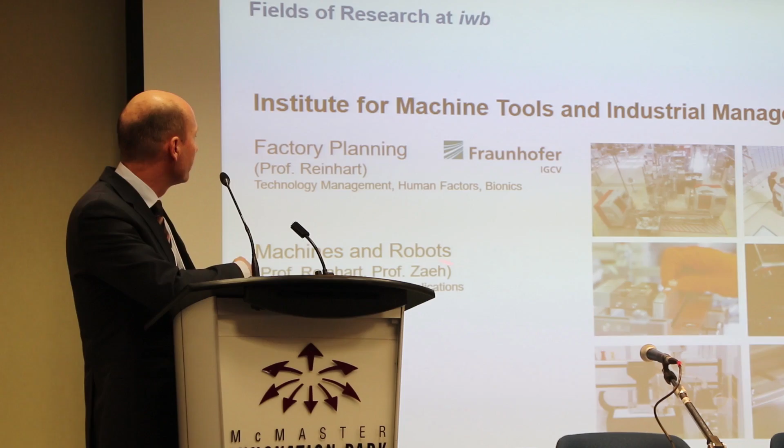Finally, we got an underground connection here, an underground line. And within mechanical engineering, together with my colleague Gunther Reinhart, I'm doing research on production technology. Gunther Reinhart is more focused on factory planning, technology management, human factors, bionics and others. Myself, more on technologies - cutting, joining, and additive - and both of us have some overlap in the mid-level on machine tools and robots. Here you see a view of our laboratory, about 3,000 square meters of floor space.

We have 2 big laser cells where we can do research on joining and cutting using lasers with full laser safety. The highest or most powerful laser source has 8 kilowatts, so that needs a very thorough design of laser safety. We also have a dry room, a clean room, to do research on battery manufacturing, lithium-ion batteries that are used for electromobility, but also for what we call the energy transition towards green energy.

The presentation is outlined as follows.

I would like to give you my personal definition of Industry 4.0, a very short definition. After that, I'll explain some approaches from our machine tool research and show how this connects to Industry 4.0. I'll talk briefly about additive manufacturing being part of it, as I consider it. Artificial intelligence is a promising thing to take advantage of in production. Then I'll show you some examples of research and other companies and give recommendations on how to tackle it.

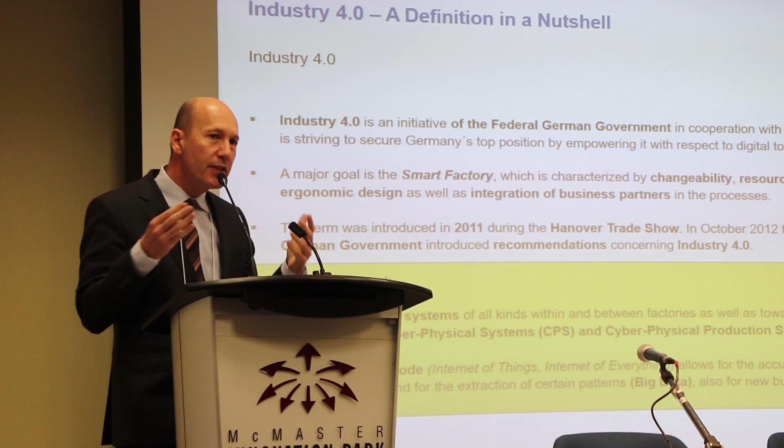To bring it to the point: networked systems of all kinds within and between factories, as well as towards customers. These items and objects we have already been used to calling cyber-physical systems or cyber-physical production systems. This word is a little bit older, meaning systems with some kind of computational power inside of them, some kind of intelligence, and above all, able to communicate.

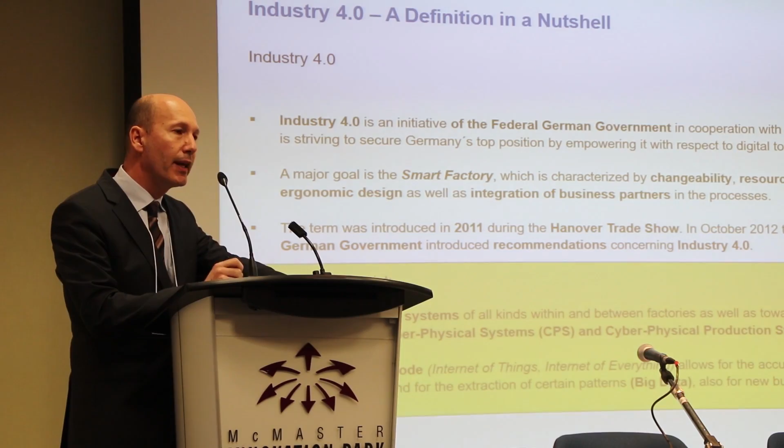This creates data, this interconnected mode. So we are talking about big data approaches, taking advantage of certain patterns in that data. And it will also allow for new business models. So companies have to be aware of remaining up to date, not losing their competitive position because someone else develops a new business model. For example, if someone would position himself between automobile manufacturers and customers in such a way that customers just pick a vehicle on demand, just when they need it.

So that's my definition, and I could finish my presentation at this point because there is not more to say about what Industry 4.0 is. It's as simple and easy as that.

However, the question is, what is it good for? Is it a new bubble that will explode soon, or can we take advantage of it? And certainly we can.

Certainly we can. It's meant to, or people think it's good for, increase of flexibility, smarter integration of the workforce. We say meaningful work, meaning to take advantage of the intelligence and capabilities for fine manipulation of humans, but integrate them more smartly, relieving them of high workloads just from carrying objects and things like that. More efficient use of resources, reduced time to market, improved competitiveness, and so forth.

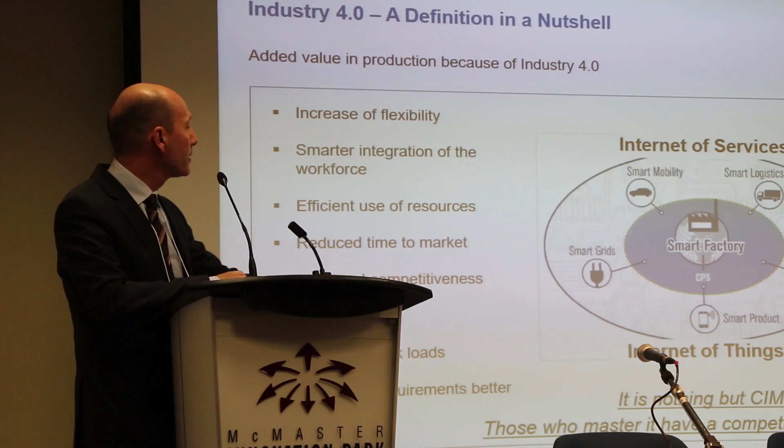And if you look at this, it's nothing but CIM, computer integrated manufacturing, reloaded, which we were talking about in the late 80s and early 90s. A computer does everything from the designer's idea until delivery and servicing of the product. This CIM approach failed, so basically we start from scratch, or we start again. The good news is we have better methods, more developed methods, and better tools today than we used to have in the late 80s and 90s.

So those who master it will have a competitive advantage.

By the way, here are two new words that go along with it: Internet of Services, Internet of Things, as things communicate to each other. Or you could also say Internet of Everything.

For decades, we have already been working on an important part of it, which is the digital shadow, as we call it. It's a virtual representation of the objects that we are using in manufacturing. That means, for example, process models, finite element models to calculate a machine's vibrational behavior, discrete event simulation on the planning level, or disturbance management on the factory network level. We have been working on and making progress in the design of these systems, and they now help us again to take advantage of Industry 4.0.

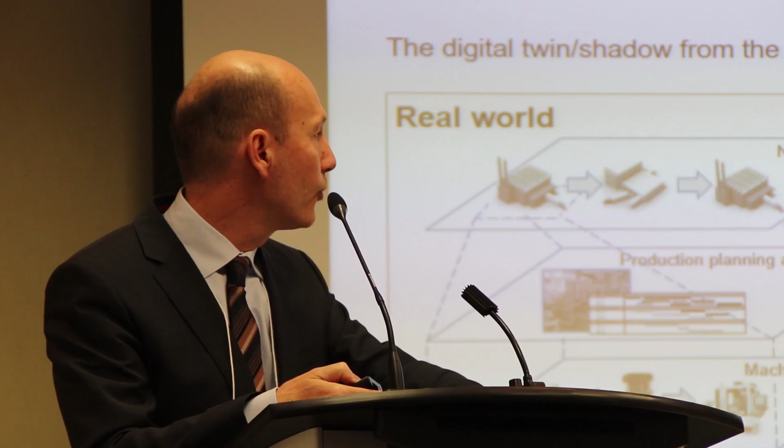Whenever you see publications in magazines about Industry 4.0, mostly there's one of those photographs, and I'm sure you have them in mind, where we see someone with a mobile device, a handheld device, in front of a workshop or whatever. So that's one important feature: delivering instructions via digital media to people who are part of the workforce.

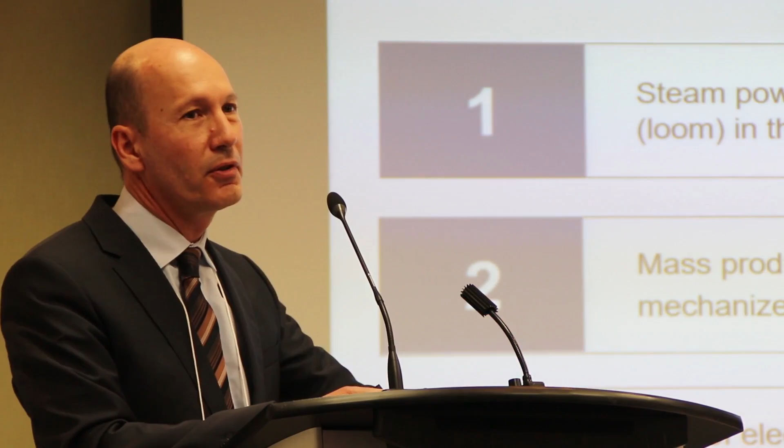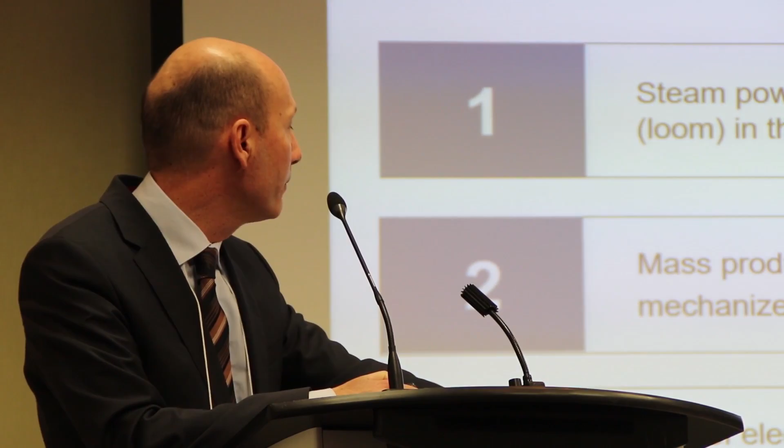So these four trends are not the reason for 4.0. The reason is this one here. We used to see a first industrial revolution based on steam power replacing human power and animal power in production. Later on, we had the era of mass production, mainly driven by two gentlemen, Taylor and Ford, with the approach of mechanized production and mass production. Since the late 60s and early 70s, we've had the use of electronics and information technology for increased automation, however still inflexible or widely inflexible automation. And now this fourth phase means flexible automation, Internet of Things, also in development.

Innovations in machine tools - I'm basically a machine tool guy. I received my PhD on vibrational analysis of circular sawing machines, and also have an industrial background in the machine tool business. So this is kind of my favorite topic to talk about, and I'll show you some examples out of our research. How will machine tools benefit from that? What are the next steps to be done to make machine tools smarter, more productive?

Vibrational behavior, self-excited vibrations, also known as chatter, will keep us busy as long as machine tools exist. That's what I'm convinced of, because everyone will always try to apply those machines at the highest productivity possible, so reach the stability border. What can we do to prevent these chatter vibrations from occurring?

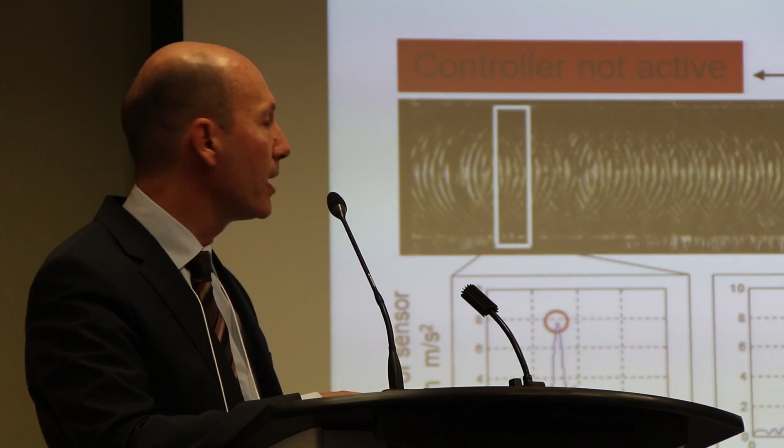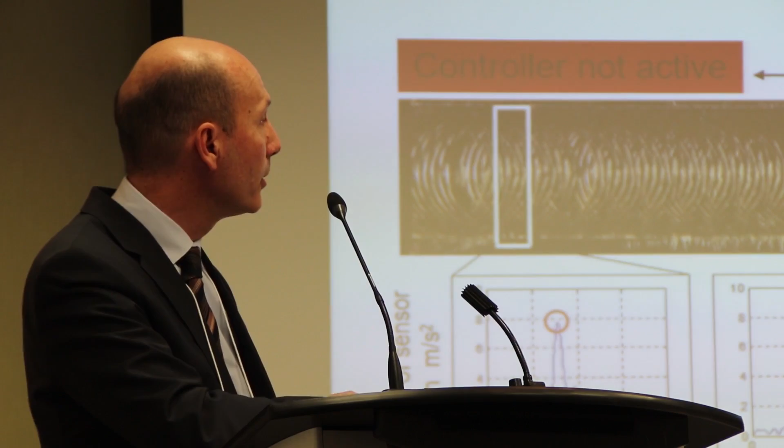So once we switch this active vibrational control on, the dynamic displacements go down. You can see this in this Fourier diagram, where we had a chatter vibration in the machine with the controller not active, and once switching on the controller, it was able to stabilize this self-excited vibration until it was no longer visible. What you see here as a peak is just the tooth pass frequency, which is not critical in this case. So with this simple approach, we can handle the problem.

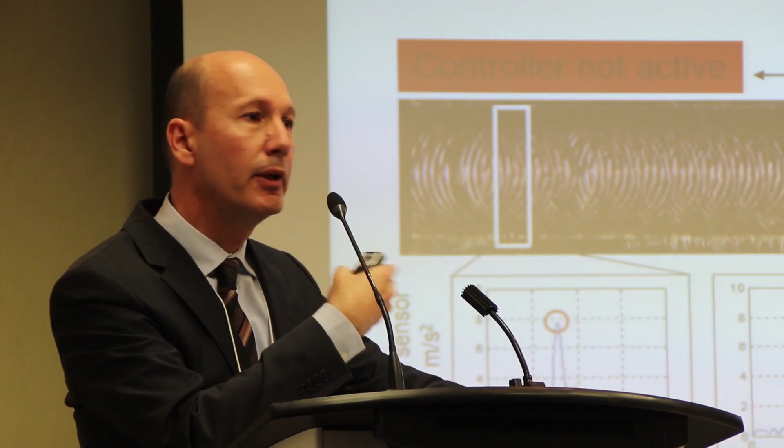However, it requires a digital shadow of the machine. We need to know its vibrational behavior from a modal analysis or a finite element analysis.

Machine tools can also be used more efficiently and flexibly, in a more versatile mode, by introducing this process or technology: friction stir welding. Probably some of you have already heard of it. It's a joining technology, a welding technology, which can be carried out in the solid state phase of a material. It works such that we have a tool consisting of a pin and a shoulder rotating. The pin is pressed towards the two joining partners.

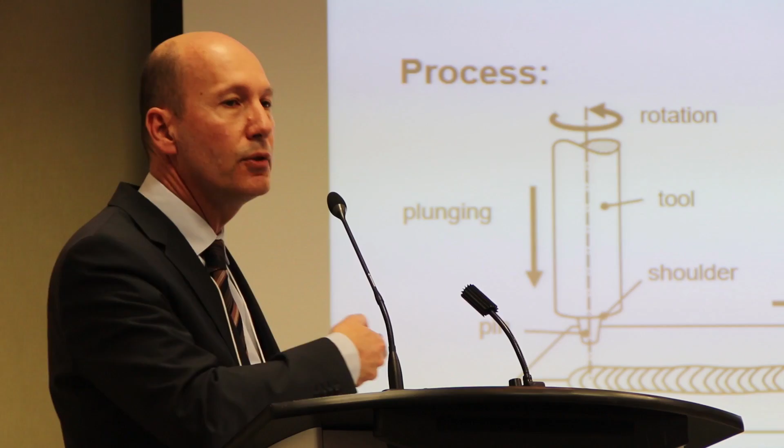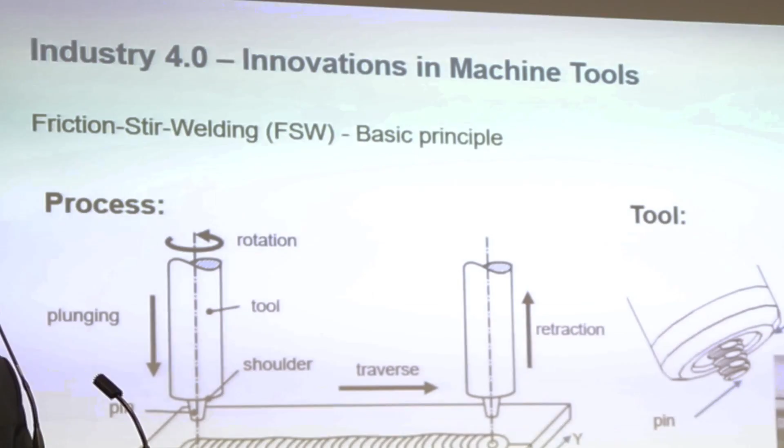You see the weld seam here in a butt joint configuration. This introduces heat into the material, softening it, which allows the pin to move fully into the two workpieces, stir the softened material, and then traverse along the weld seam, which is created here. Finally, you retract the tool. This nasty end crater remains, however there are strategies to fill it up with other technologies.

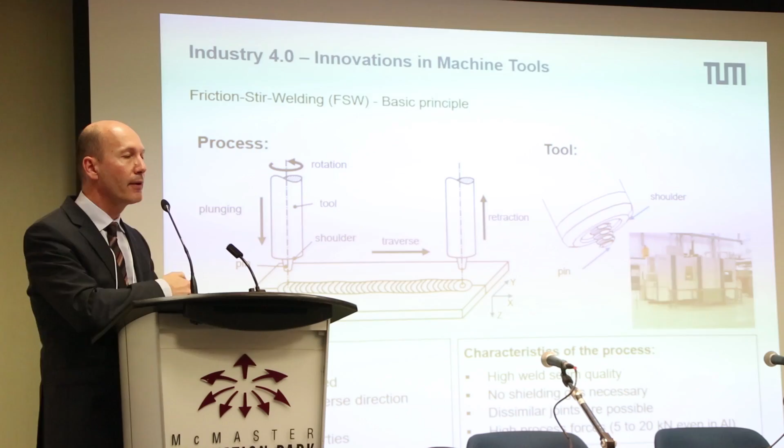And then you have a beautiful weld seam with high quality, no shielding gas necessary. Dissimilar joints are possible between aluminum and steel, for example between copper and aluminum, and even between plastics and metals. High process forces occur, and these we have to handle. It's not just as easy as moving along an NC trajectory or NC path. We have to take additional measures.

One such measure is a temperature-controlled mode. Here in the lower half of the diagram you see the situation that occurs with conventional welding, just positioning the tool according to the geometry. This would end up with high flash creation. The solution is to put a temperature sensor into the tool and use this in a control loop, a feedback loop, to carry the process out in a temperature-controlled mode.

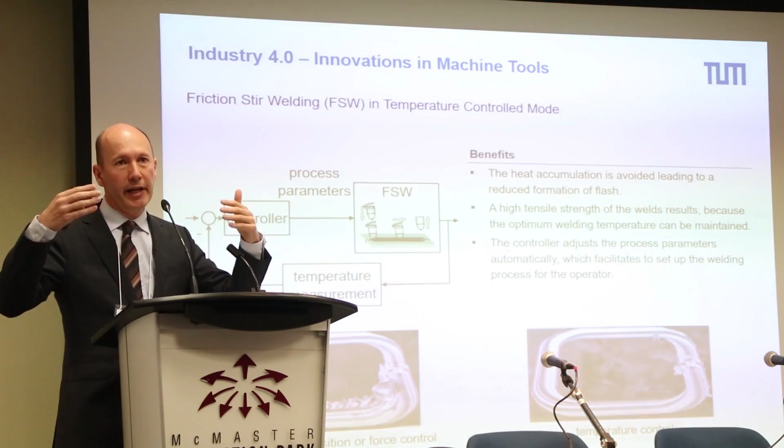On the right-hand side you see the improved situation with respect to flash creation. This is due to the fact that heat accumulation is avoided. In a workpiece with edges, when you get closer to the edges, the air around it acts as a kind of insulation, and that creates heat accumulation, which is avoided with this setup. This then yields a high tensile strength of the weld, with the controller adjusting the process parameters automatically.

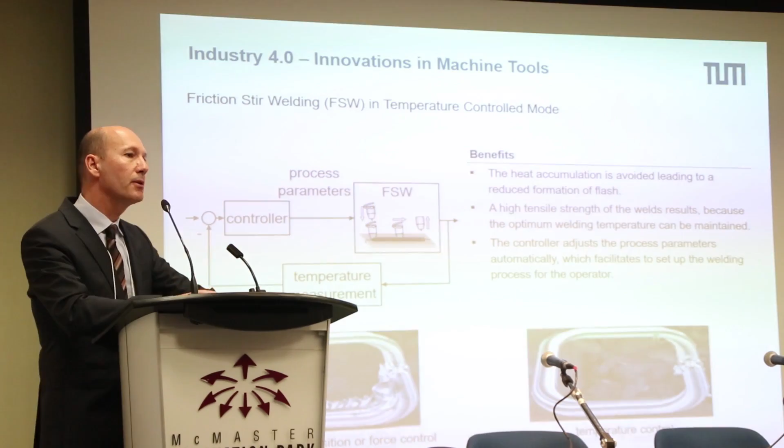Again, a digital shadow is needed here, because we need to know the behavior of the material with respect to this process. We also need a model of the machine controller so that this loop does not become unstable.

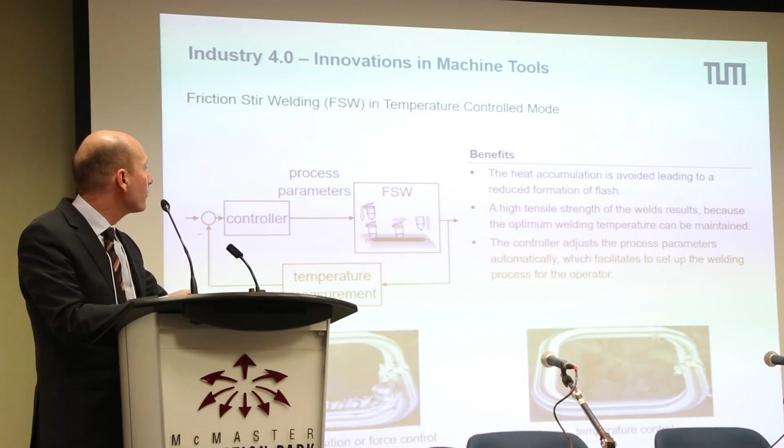The robot is becoming a machine tool more and more. The robot has several advantages and also, not to be forgotten, disadvantages over conventional machine tools. Advantages are the high working area in relation to the floor space being consumed, excellent space utilization, and low investment costs compared to a machine tool.

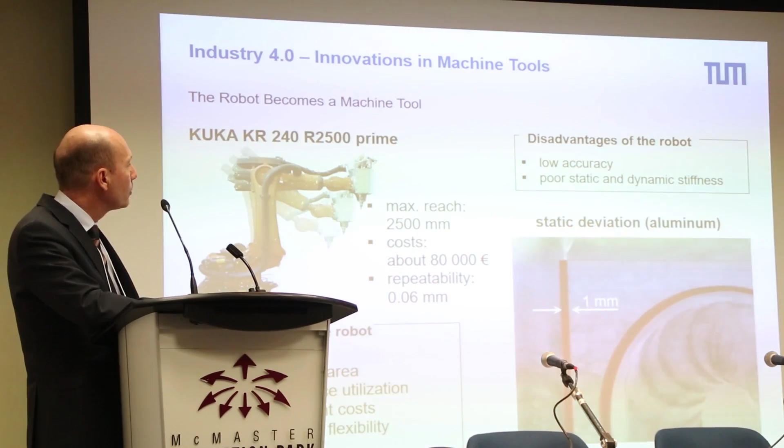Imagine the work area that this robot, the KUKA 2500, can cover compared to a machine tool. The machine tool's costs would be much higher than these 80,000 euro, or roughly $100,000, that this would convert to. However, the accuracy is not good enough, and even when cutting aluminum we have a static deviation in the range of a millimeter, which is certainly not acceptable.

So we need strategies to overcome this. Concerning the static deformations, we can take the axis signals and use them as sensors for displacements of the robot, then process the signal to compensate for this deformation, producing a correction value to be superimposed on the tool path.

This is working - we demonstrated that this is working. However, it has difficulties upon entry and exit of the tool into the workpiece, when the situation changes rapidly.

So another idea is to simulate the behavior of the robot based on a model, a digital shadow, and modify the robot control code prior to machining. That's what we are currently working on.

We were also working on the issue of chatter vibrations. From literature, we have three strategies to avoid chatter besides active damping, which I showed you before. Conventional approaches: making use of the stability lobes or pockets - very promising, very easy to apply.

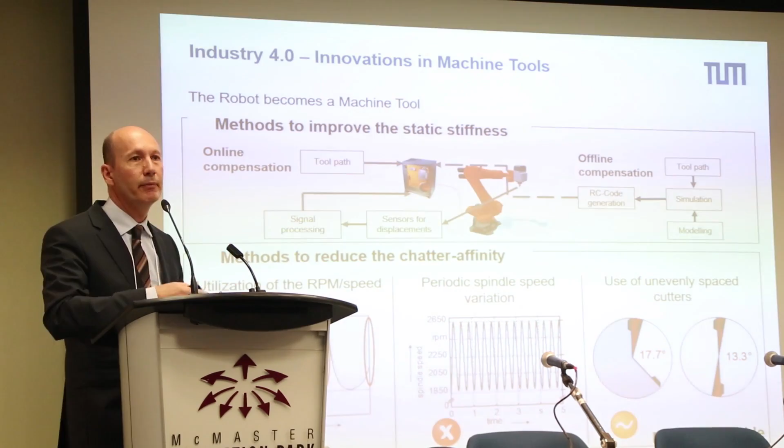Again, digital shadow helps to design such a tool. And finally, the digital shadow for the thermal behavior of a machine tool. Now, it's already enough of an effort to design a finite element model for a machine tool to calculate the vibrational behavior or static deformations. Would anyone want to take the additional effort to create a new model for the thermal behavior?

Probably not. So the idea, which one of my PhD students came up with, is to use the mechanical finite element model and convert this into a thermal model.

What's necessary to do that? It's necessary to identify surfaces of the components and to introduce the thermal transport phenomena, such as convection and conduction, in the components and between them. And you have the model. This demonstrated to be valid and capable of simulating the thermal behavior of the machine tool, the thermal digital shadow.

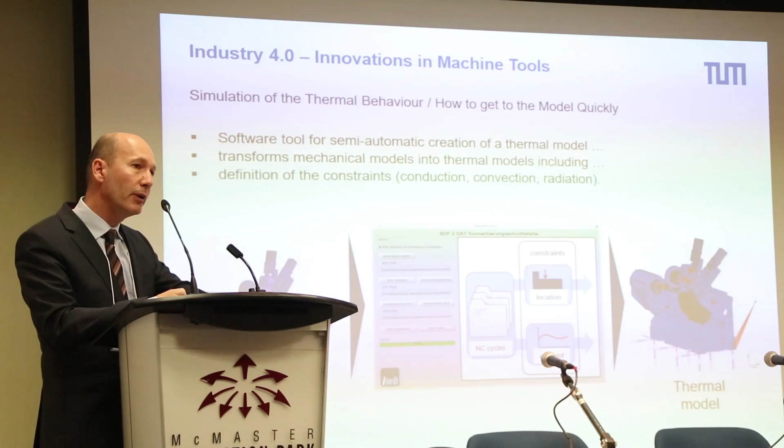Additive manufacturing is part of it, everything being connected. That has always been the case for additive manufacturing, because we need a 3D CAD model of the workpiece to be manufactured—it only works from 3D CAD. So you can apply additive manufacturing, or 3D printing, also in this connected mode: design a part here, send the model to Singapore, and print the part there. It's a matter of minutes to transfer the data to different places, to all other places in the world.

You're familiar with the process sequence used in powder bed additive manufacturing. Once you have your 3D CAD model, you triangulize this and slice it into virtual slices. If necessary, create the supports in the model, then transfer the result to the machine, which manufactures the workpiece slice by slice, layer by layer. In the end, cleaning is necessary—removal of the powder not being solidified—and a finishing process.

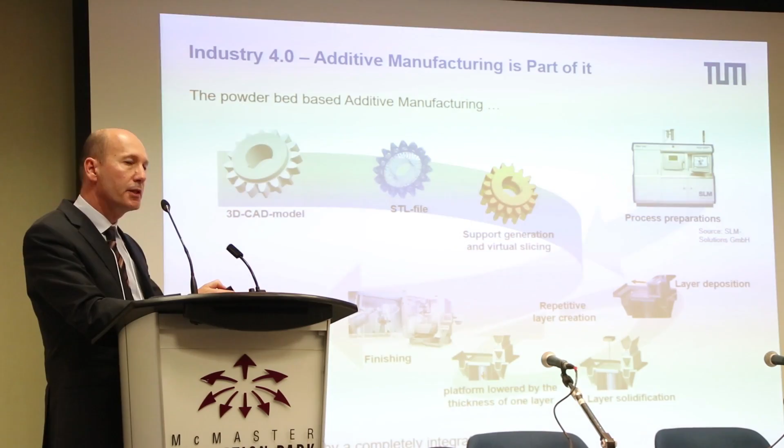So it's a completely integrated process chain which perfectly fits into Industry 4.0. And it opens completely new possibilities, in particular because geometric features come for free. What you pay for, the costs, stem from the part volume, not from the design, shape, and number of its features. You also have the possibility to manufacture parts that are connected to each other and movable toward each other.

What you see here comes out of a research project together with my colleagues at the Fraunhofer Institute, demonstrating how this can be benefited from in the design and manufacture of gears. First of all, you see the lightweight design with this topology-optimized structure, and you see conformal cooling channels delivering the coolant just below the surface and delivering it at the teeth contact where it's primarily needed.

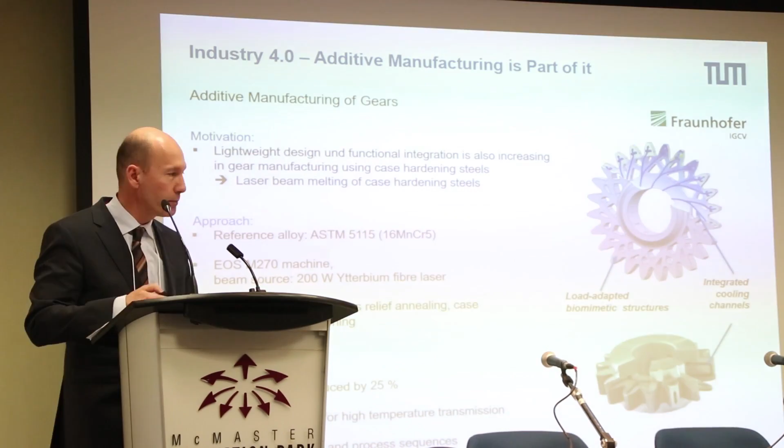Here you see the parameters of the process. The result was a 25% mass reduction, conformal cooling for high temperature transmission, and shorter lead times in production. The second example comes from a tool manufacturer.

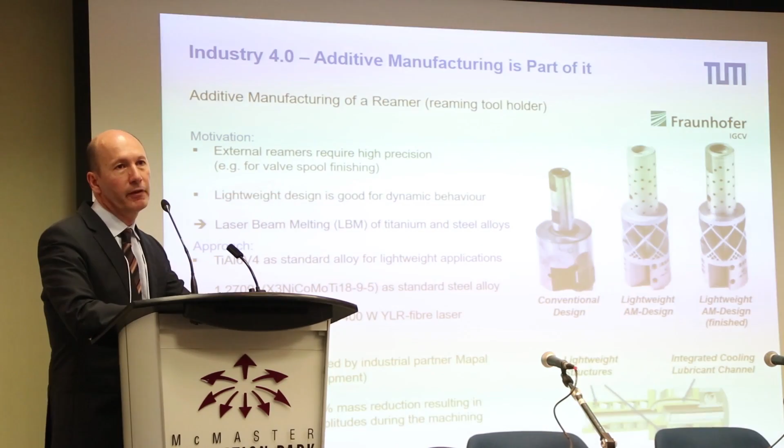You see here a reaming tool, or reamer, in the conventional design. The issue for the company was that this is susceptible to chatter vibrations, or high amplitude vibrations, because it has quite a high mass. The idea was to reduce the mass with this lightweight design, which would certainly not be feasible for conventional manufacturing technologies. Imagine having to drill these holes here and so forth.

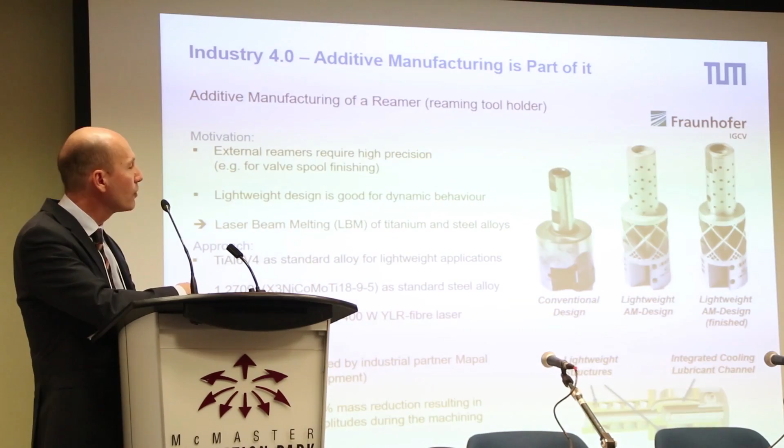So additive and this perfectly go hand in hand with each other. Here you see again the parameters: standard steel alloy, SLM machine. Shortly after completion of the project, the process was adopted by the manufacturer, the Mapal company, achieving a 54% mass reduction and lower vibration amplitudes when applying this tool.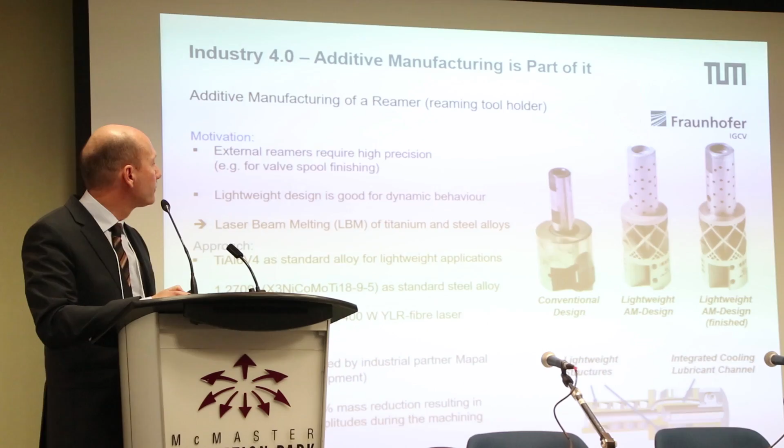This is coming out of research, still in the research phase. We are able to do what we call bionics—learning from biological structures. How do they accomplish lightweight design? For example, using honeycombs. We came up with a data manipulation procedure to fill a support structure with honeycombs, as you can see here, and this structure can be arbitrarily designed, more or less.

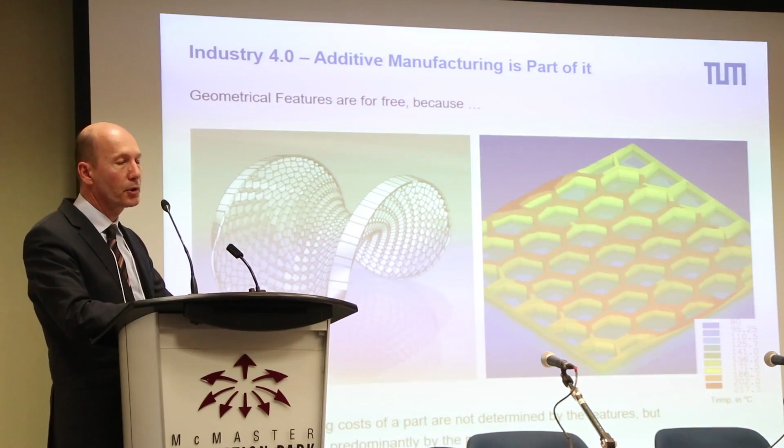This also required a digital shadow here in order to simulate heat accumulation and heat-induced distortions in these honeycomb structures. This demonstrates that we have a model at hand to calculate those distortions and avoid them without a trial and error procedure.

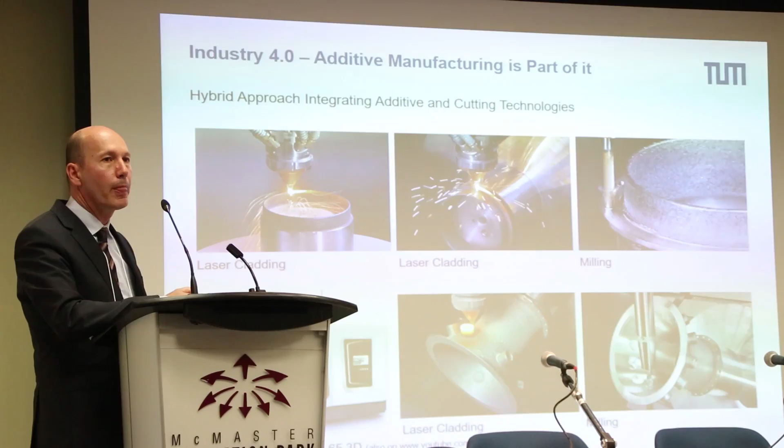DMG Mori introduced this a couple of years ago, also during the Hanover trade show—I think it was during the EMO, another machine tool show. This is a very interesting process which allows manufacturing of filigree structures such as this one very rapidly and very accurately.

Artificial intelligence is a promising thing. And what is artificial intelligence, ladies and gentlemen? It is again learning from biology or humans.

How do we learn to walk as children? By trial and error, and by connecting neurons in our brain in a certain way, and then just replicating this. So artificial neural networks. And nature does learn by evolution. We as humans have developed from evolution by the principle survival of the fittest, and we can apply the same principle in production.

I want to demonstrate that using two examples, one coming from planning tasks and another one coming from more or less the shop floor. The one from planning is taken from an industrial project that we were working together in, about 14 years ago. A manufacturer of household appliances with his factory for dishwashers west of Munich.

And the logistics situation is such that demand from the market is being collected by dealers, by distribution centers, then communicated to the factory, to production, and then the demand from all those distribution centers and so forth are collected to certain production orders, and then after manufacturing, of course, shipped to those centers.

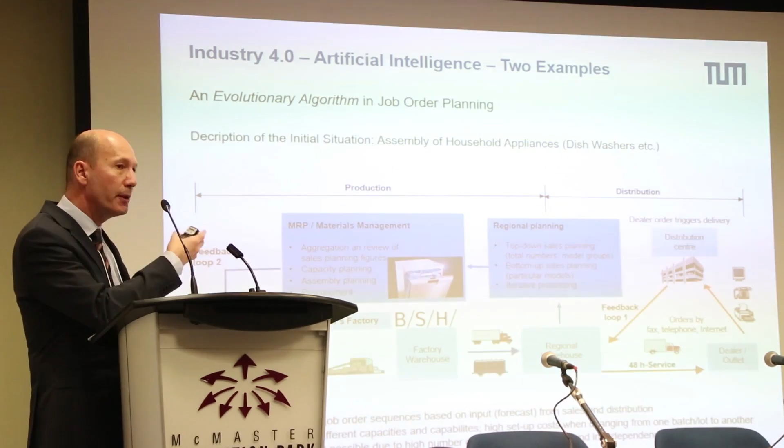Planning for a day's load of work was manual before the project. That means there was a person in charge of the task to dispatch all the orders for a day to 8 different lines of assembly. The manufacturer has 8 different lines of assembly with different capacities and different capabilities.

And of course, changeover and capacity load for those lines was the issue. Changeover times between two orders, because every time you change over from one order to the other, all the unnecessary components have to be moved back to the warehouse, and the new components have to be brought from the warehouse. So this is cost and effort.

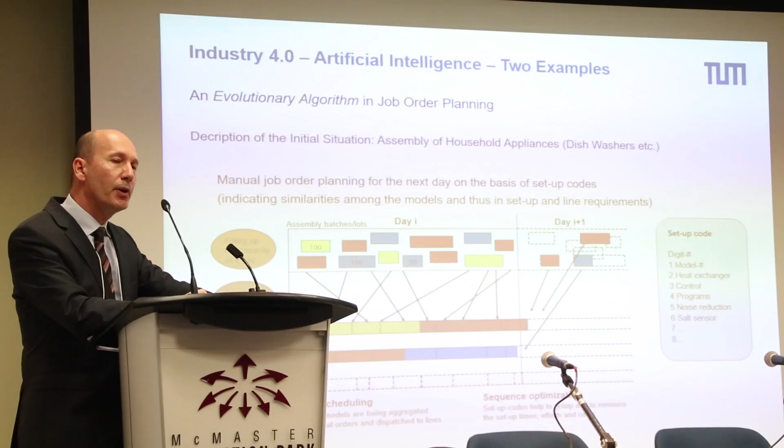And it took this person about 2 hours every day to carry out this planning task. An SAP dialog did support that, but still required the creativity of the person in charge and 2 hours of his time.

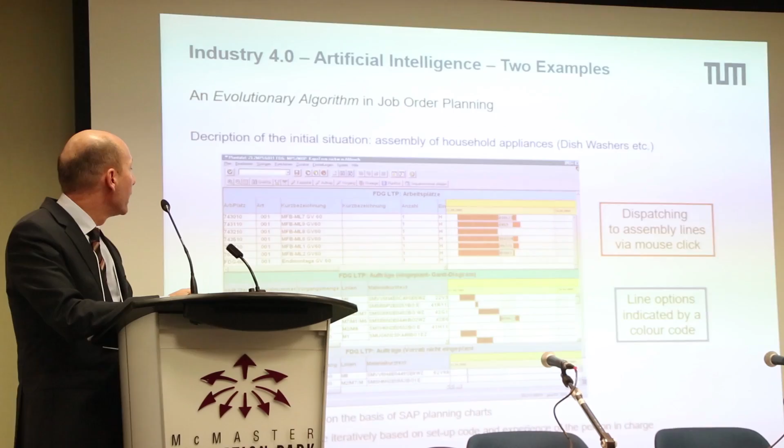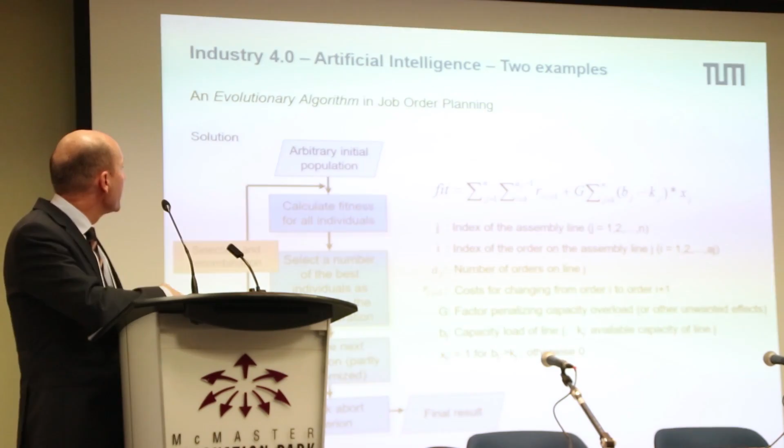And the idea was to set up an evolutionary algorithm to suggest solutions for the problem. An evolutionary algorithm, what's that? It's basically a program loop which starts with a randomly set initial population, which would be a certain way these orders are dispatched to the lines, completely randomized or arbitrarily.

Then a fitness function is calculated, and basically it sums up all the changeover efforts from one order to another for all orders, for all lines. An additional factor can be used to penalize, for example, line overload or lateness of an order and things like that. And then it selects a portion of the best of the individuals, taking the best of them, selection, as parents for the next generation.

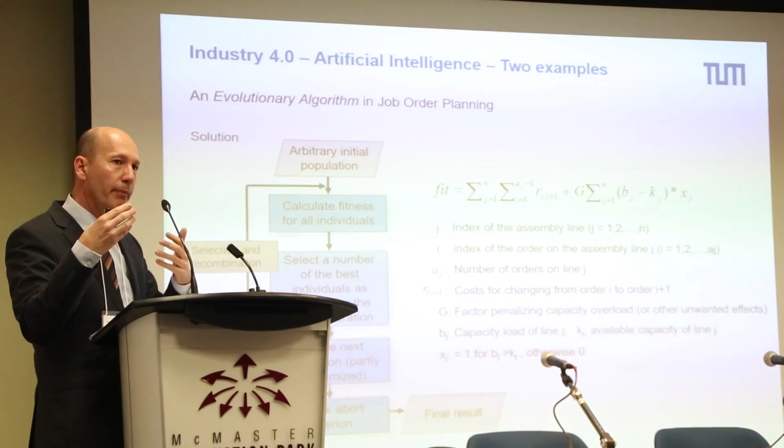Then again, random comes into play. That means applying random changes to these solutions and create the next generation, the offspring. Check this towards an abort criterion. Is the fitness function below a certain threshold? If yes, stop and take this as your solution. If no, continue the iteration.

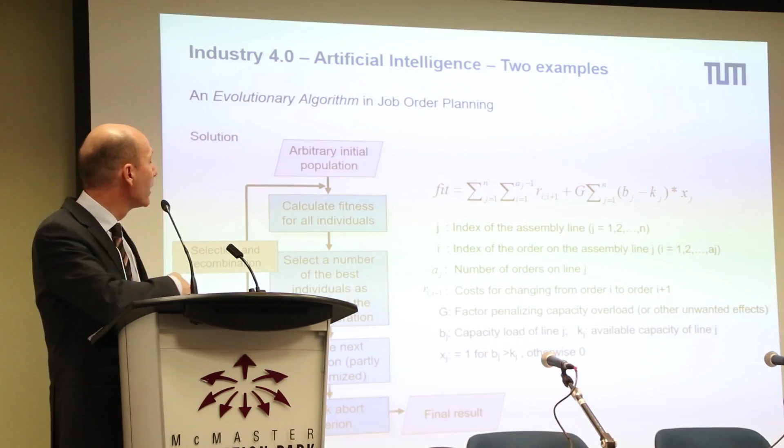So it's mutation, it's selection and recombination, and it's mutation and reproduction. How we, as humans, evolved from nature.

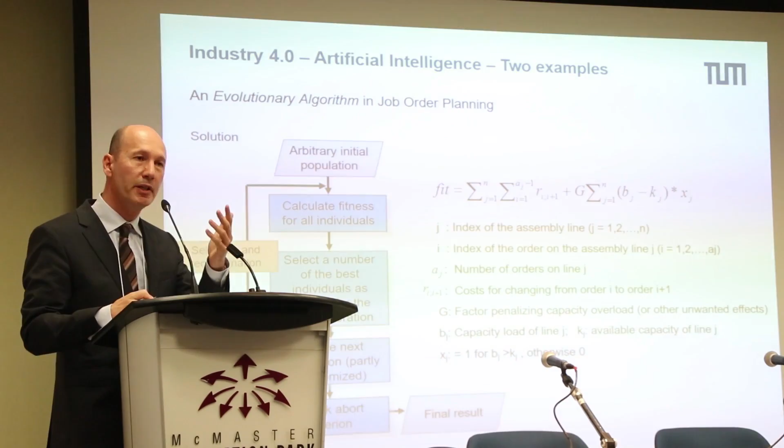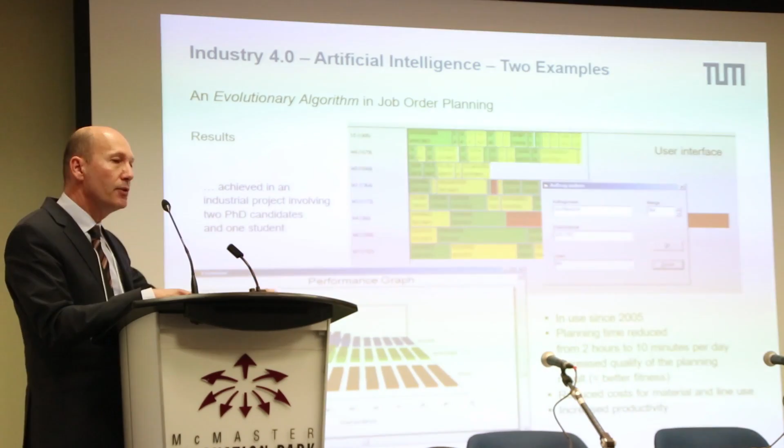And when implementing this, it became obvious that the abort criterion is reached within a very low number of iterations, 10 in this case, and now no matter how bad the initial solution was, the algorithm would always end up with a very, very good solution, reducing the workload for the person to 10 minutes per day, and it's in use at this manufacturer since the year 2005. Ended up in reduced costs for material and line use, allowing for more meaningful work of this person.

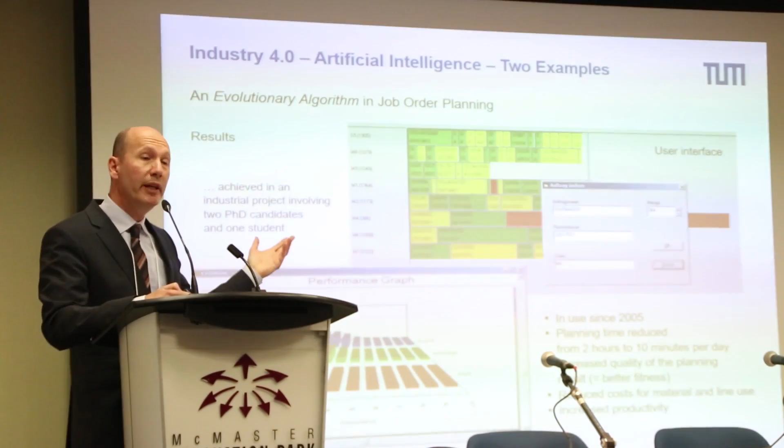Second example, a structure that can be welded. It's an arbitrary structure representing all kinds of frameworks that need to be welded, are made from sheet metal, for example, and need to be welded. In this case, using lasers for creating the weld seams.

And here you see 4 such pieces of sheet metal. In work before, we established finite element models to calculate the distortions coming from the heat. And that's the issue here, because you would want to close your framework, such kinds of frameworks, in the end without any tension or without any strains or stresses, without any distortion between the two ends.

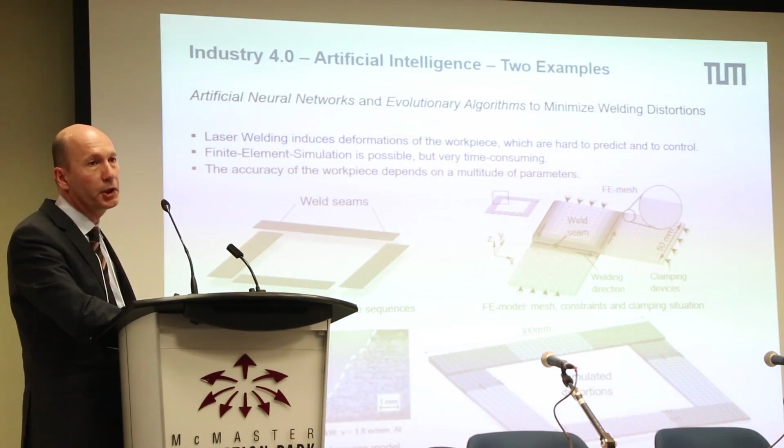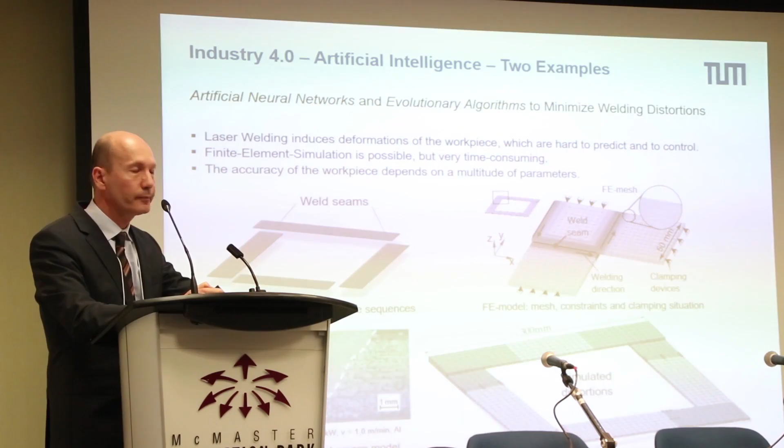Normally, you end up with a distortion, and you would want to minimize that. We established heat source models required for the finite element calculation and the finite element models for the weld seams. However, the task to minimize these distortions is not trivial, because you have many process parameters,

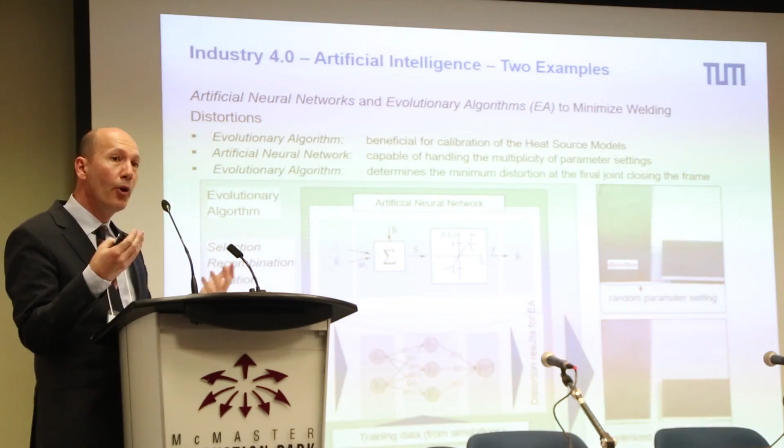and many different sequences of welding. Here the approach of my PhD candidate, with the thesis to be published within a few months from now, was to have an artificial neural network which learns from a few finite element calculations, because calculating all possible combinations of parameters, sequences, and so forth would take months, if not more. So that's not feasible. The idea is to just take a few such simulations to train an artificial neural network. Neurons need to be connected, with each of them having a certain mathematical function behind. So the neural network learns to replace the finite element calculation.

However, it in itself is not capable to optimize. For that, he is using an evolutionary algorithm which selects, recombines, and mutates the parameters, which are then fed to the artificial neural network in order to come up with the solution for the distortions, and then this whole thing optimizes.

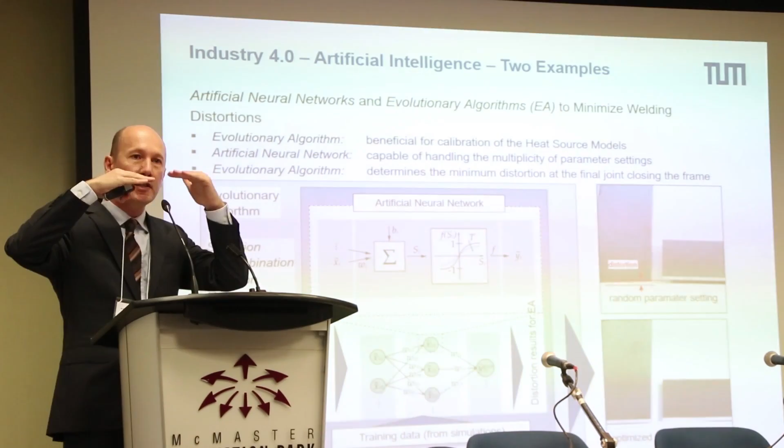You see the results on the right-hand side. The upper picture shows just a random parameter setting with the distortions. Don't be confused by this big gap here - it was left intentionally to make the whole thing better visible in such a picture. The distortion is the vertical one here between the two ends. And the process is optimizing this, achieving a situation such that the two ends have the same height in vertical direction. That's artificial intelligence.

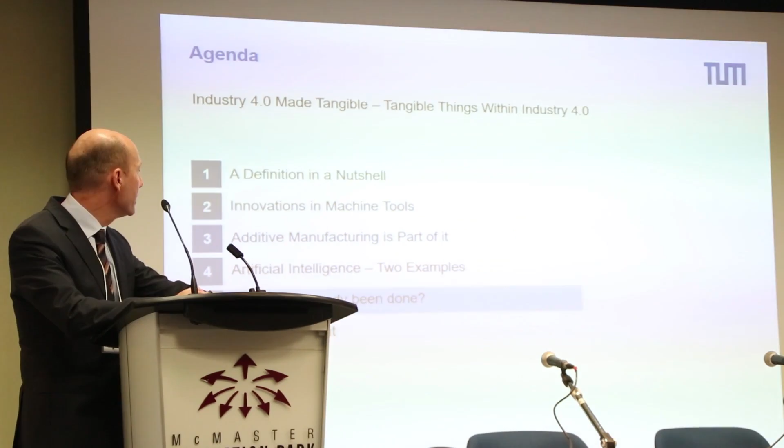Now, coming to the next point, what has already been done? How are enterprises taking advantage of that? Two examples from industry, two from academia, or cooperation between academia and industry.

Bosch Group, Rexroth Bosch Group, a manufacturer of hydraulic equipment, fittings, valves, and things like that. This was published a while ago as a case study. Bosch Rexroth is implementing Industry 4.0 on the shop floor step by step, small but quick steps. Important - you can't attack everything at a time. You have to select what is promising for your enterprise and then try to take advantage of that as quickly as possible. Gain experience in pilot projects. Within the group, there are 100 or more such projects.

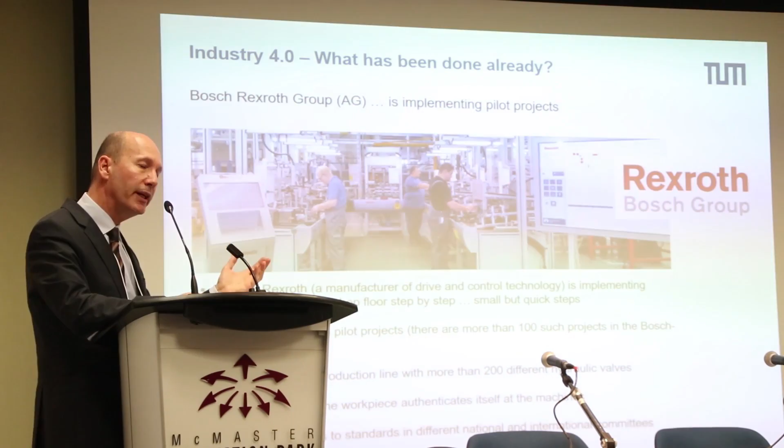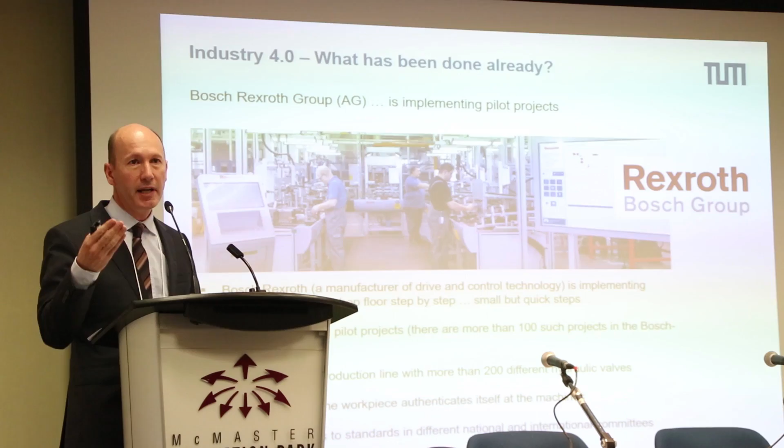In this case, you see here a semi-automatic production line with more than 200 different valves to be manufactured. Flexibility is needed - automation, yes, but in a flexible mode. The workpieces identify themselves by an RFID tag, and this enterprise, among many others, contributes to something very important: the establishment of standards for the communication interfaces.

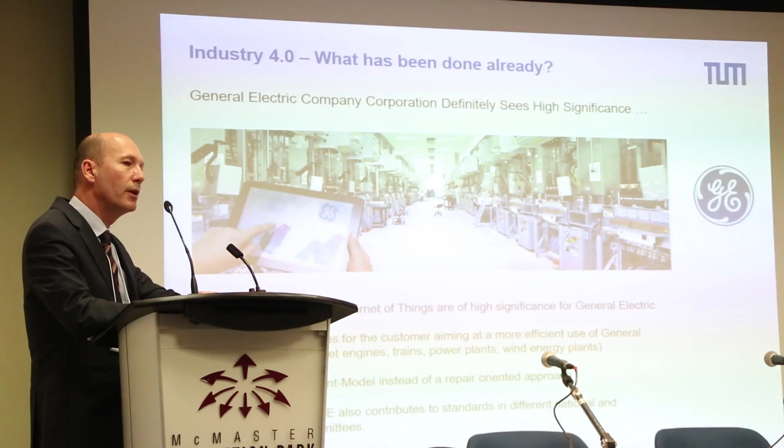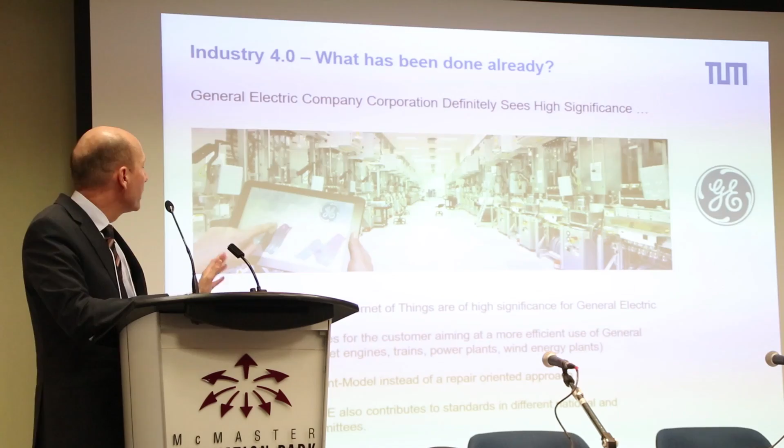General Electric company is doing the same thing, also contributing to standards. They say that Industry 4.0 has definite significance for the enterprise, in particular in the Internet of Things, and they are trying to apply this to carry out their customer service in a better way. In the past, up to now, they used a repair-oriented approach - when something breaks down, it needs repair - and they want to make the transition to more of a predict-and-prevent model with respect to that.

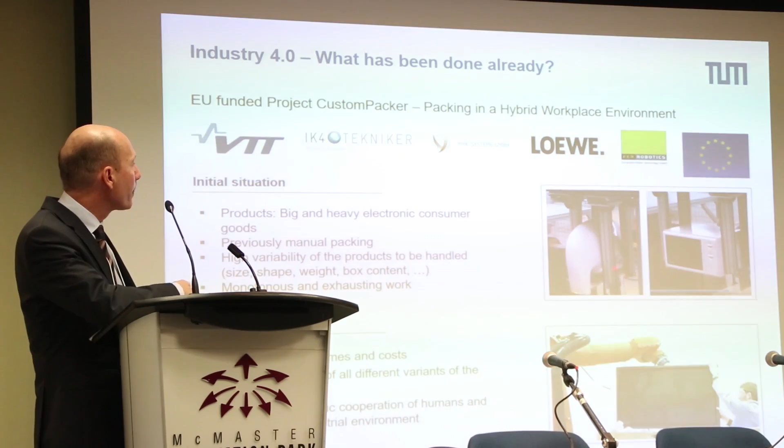Currently, we are working together with machine tool builders and tool builders to establish an interface for tools and machines, tools and spindles. Here you see a number of German tool manufacturers and component manufacturers for machine tools, and the idea is to have an interface that is capable of transporting the data coming from sensors in a tool to the machine. Internet of Things: the tool communicates with the machine.

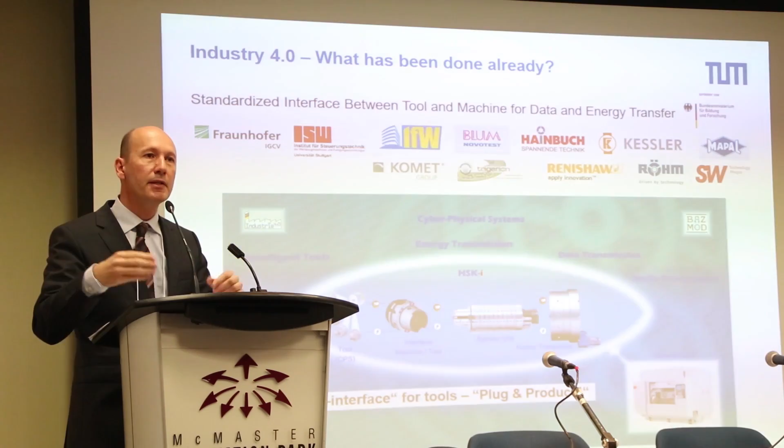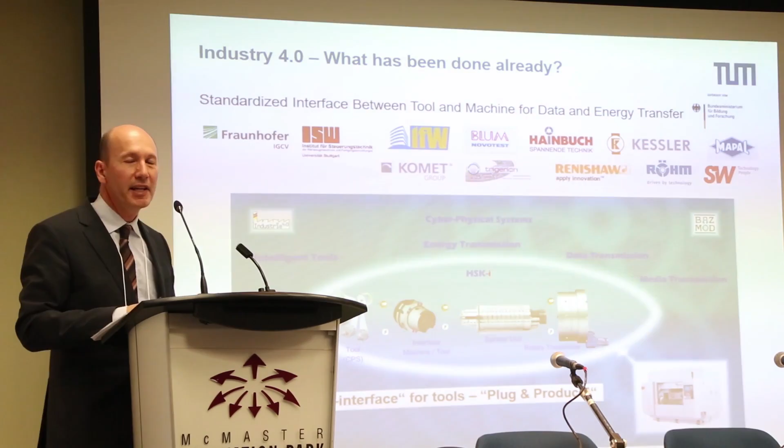And feedback signals such as, for example, for ultrasound-assisted manufacturing, ultrasonic cutting, which reduces the cutting forces. And of course, there are many other things you could transmit through this interface. We call it, or I call it, the USB interface for tools, like your USB device. You just plug it and play, or plug and produce.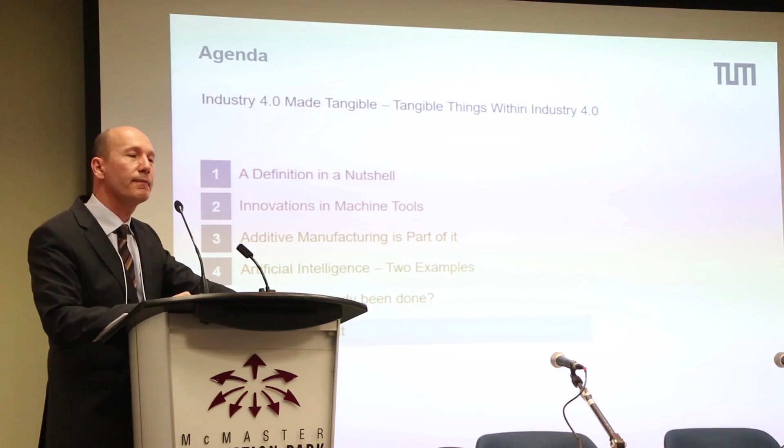How to tackle it? What would be the recommendations? Four slides here. First, take a look at big data - additional value, is that possible? As an enterprise, I would ask: is data already acquired and stored, for example because of legal regulations, customer requirements, or traceability issues in pharmaceutics or aircraft manufacturing? Are tool monitoring systems in use? If so, which conclusions can be drawn, which analysis is desirable, is data missing, and if so, how can it be gathered?

Look for quick wins in the field of big data, just do it. A fruitful environment would certainly be a brainstorming session, a workshop, if possible with academia.

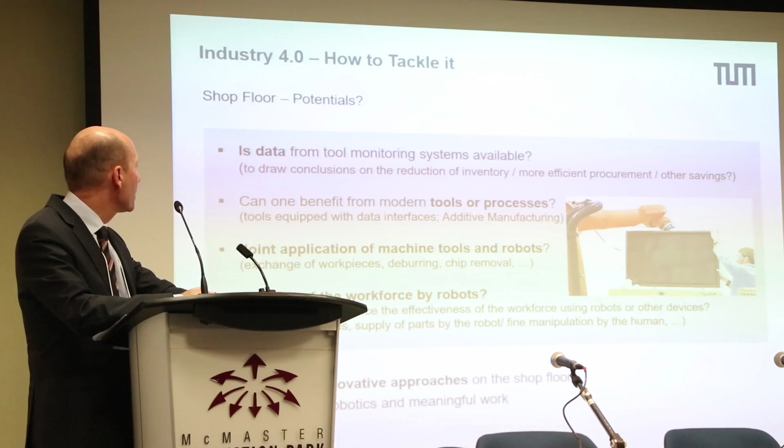On the shop floor, is data from tool monitoring systems available? Can one benefit from modern tools or processes, such as additive manufacturing - the reaming tool in the set of my examples? Joint application of machine tools and robots, for example the robot servicing the machine, removing chips, exchanging a workpiece or a tool. And can you apply robots to support your workforce, so that the workforce is able to do more meaningful work?

Are there potentials in sales, supply chain management, customer service - the so-called indirect parts of the factory? Is monitoring of your supply chain possible via network? Kanban, just-in-time delivery possible? Data entry by the customer?

The company I used to work for, the Gleason Works, with headquarters in Rochester, New York - I was an employee of a German subsidiary - had a solution for that already in the 90s, when dealers could enter orders for tools via the internet, and these tools would be produced in the factory with no further human interaction. Data entry by the customer, or at least by the dealer, the sales agency.

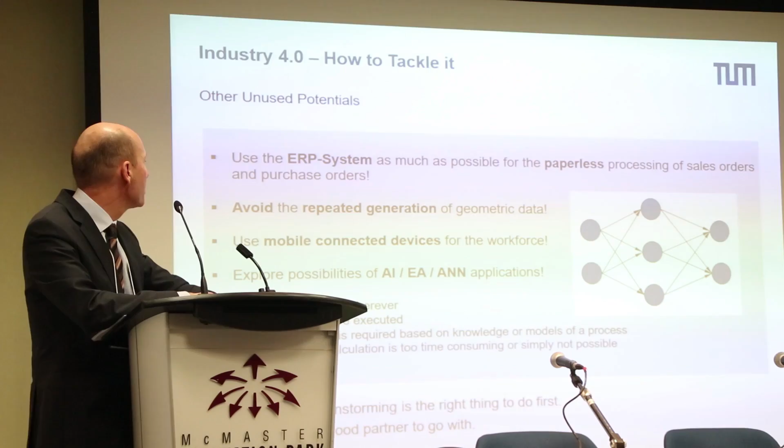Are there new business models, new opportunities to take advantage of? For machine tool builders, machine tools today are mostly controlled using personal computers. That in itself is Industry 4.0 compatible, so it can transfer data to the machine tool supplier and allow for evaluation of this data. Are there other unused potentials, for example concerning paperwork, repeated generation of the same geometrical data of workpieces, or possibilities of artificial intelligence and so forth?

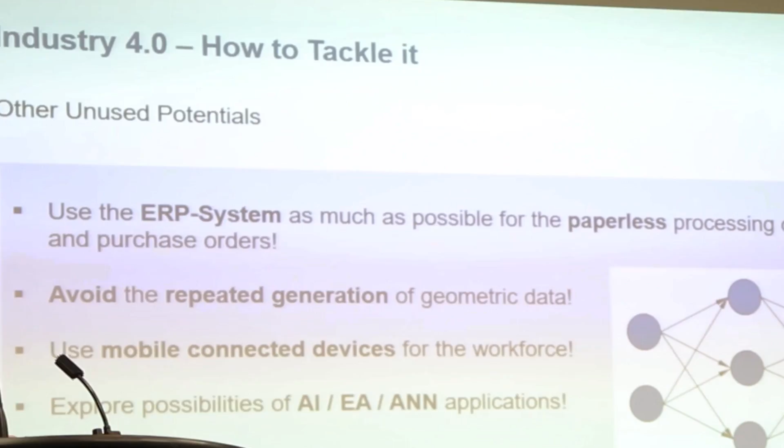I hope I could convince you that Industry 4.0 is something very simple to explain. Objectives are, among others, increased flexibility in production down to lot size 1 manufacturing scenarios, increased productivity, reduced time to market. I'm convinced it's not a job killer, it's a job creator for those who learn how to handle it smartly, who use it wisely - not all at once, but piece by piece, step by step. It's not a revolution that changes the world from today to tomorrow. Everyone still has a chance to come aboard.

However, everything has to be developed and earned. There is very little that you can buy off the shelf. Sensors, actuators, that kind of stuff, even additive manufacturing machines - those are available. But to tailor it to your enterprise, you have to do that by yourself.

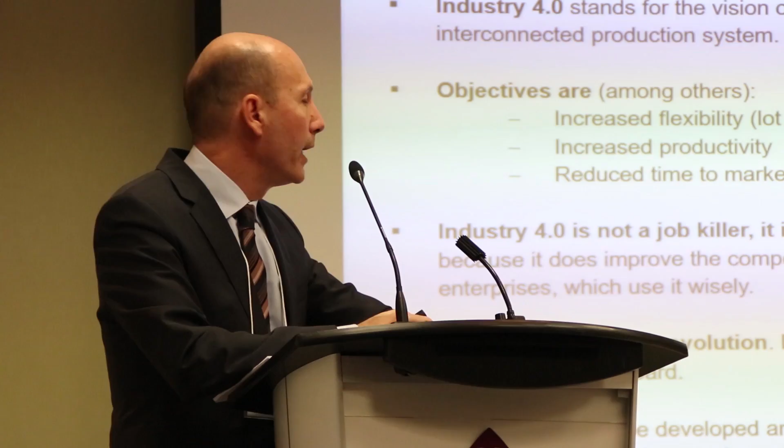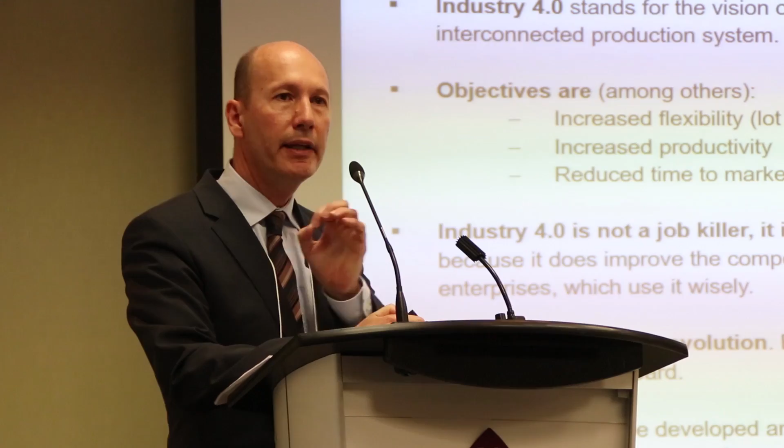Germany, where I'm coming from, has done quite well up to now. We came through the 2008-2009 financial crisis quite well because we have 25% of our GDP coming from manufacturing, which is quite high - much higher than, for example, Italy, France, UK, our direct neighbors. And we have a very good funding scheme, very good support from politics, from government, funding both academic research and industry cooperation in a smart balance, I would say.

Taking a particular look at the machine tool, does that mean today's machine tools are obsolete? Will they look completely different in the future? I wouldn't say so. They will look pretty much the same as today, like this one here, or like the robot being a machine tool. They will just have better inner values. And that concludes my presentation, ladies and gentlemen. Thank you very much.